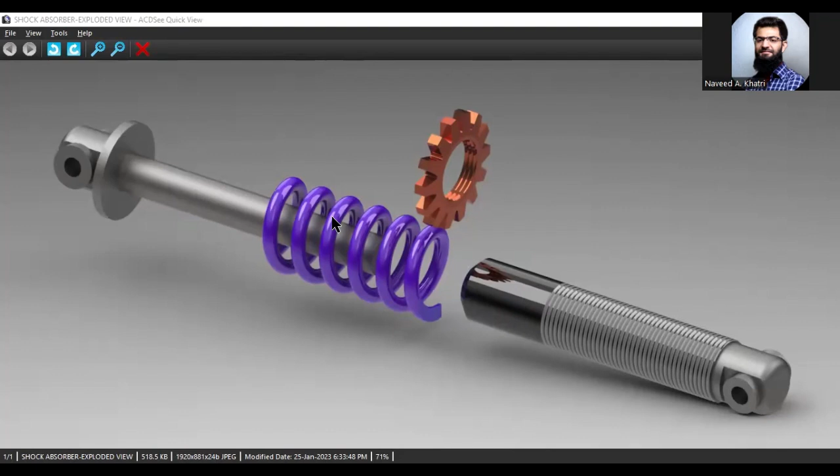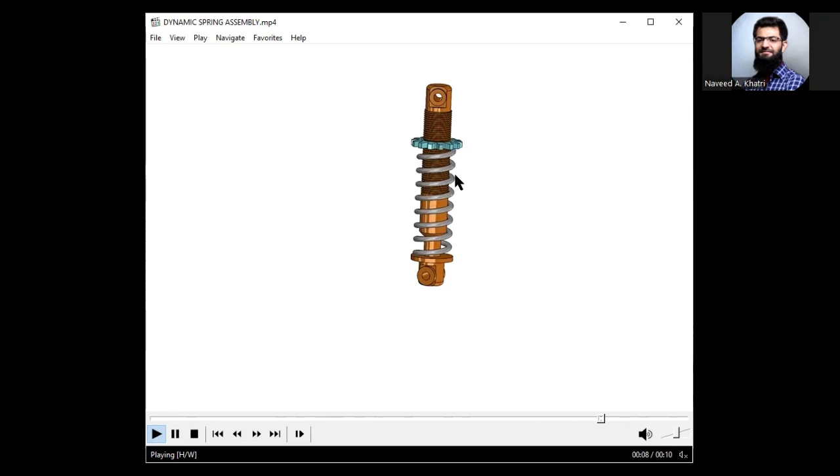In order to assemble this, what we saw in our class is that there could be two possibilities. First, as shown in this video, the spring compression and elongation is done with the help of this nut, which has a screw mate on the cylinder. When you play the animation, the nut will rotate along with the spring. The second option is that the nut is no longer rotating in the animation; instead, the elongation and compression of the spring is done with the help of the cylinder head. This is the usual scenario encountered when a normal shock absorber is in service.

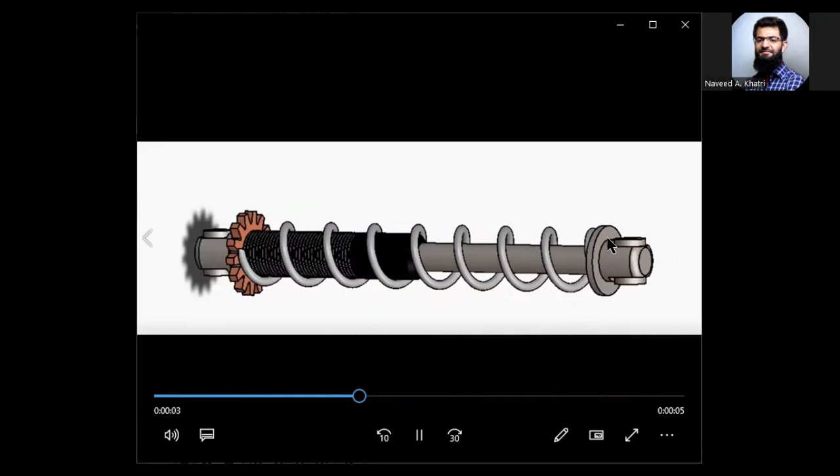So according to our class, we will try to assemble in a way that the nut is fixed and the shock absorber will move with the help of this cylinder head. So let's get started.

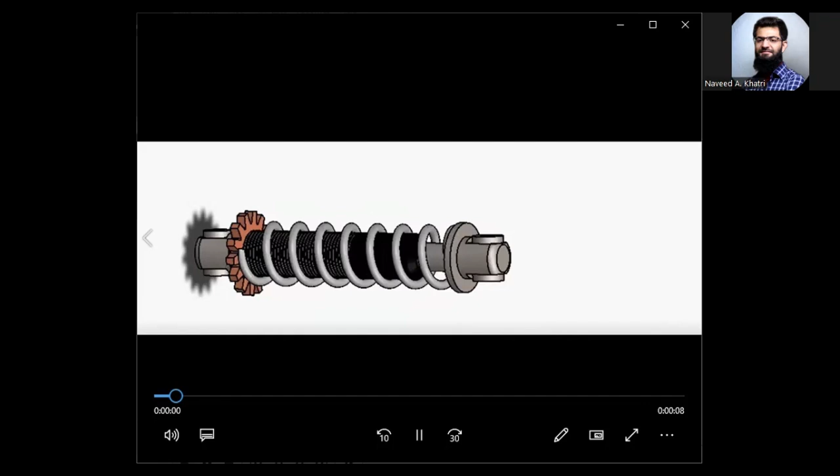Here in SolidWorks, we have already opened all 4 parts. Now you can go here, click on New Assembly. As soon as you open the assembly, on the left panel, all the parts are listed. With the help of the Control key, you can select them all and then click on the canvas.

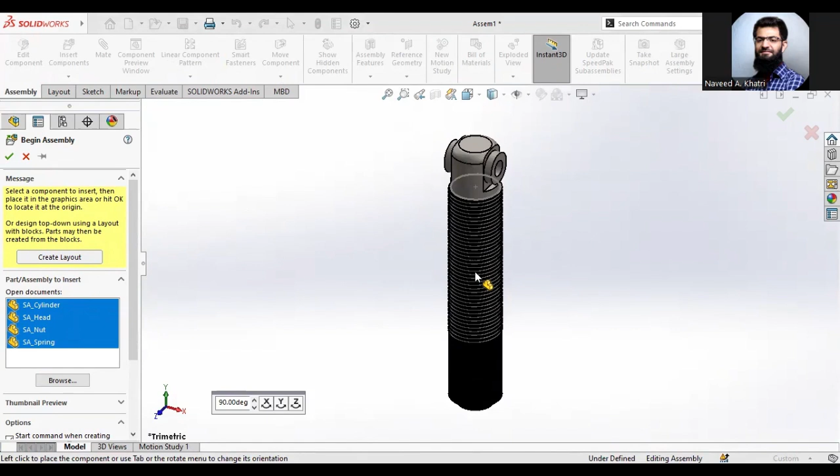Our first part is the cylinder, second is the cylinder head, third is this nut, and finally the spring. Once you have placed all the parts, you can start creating mates to assemble them.

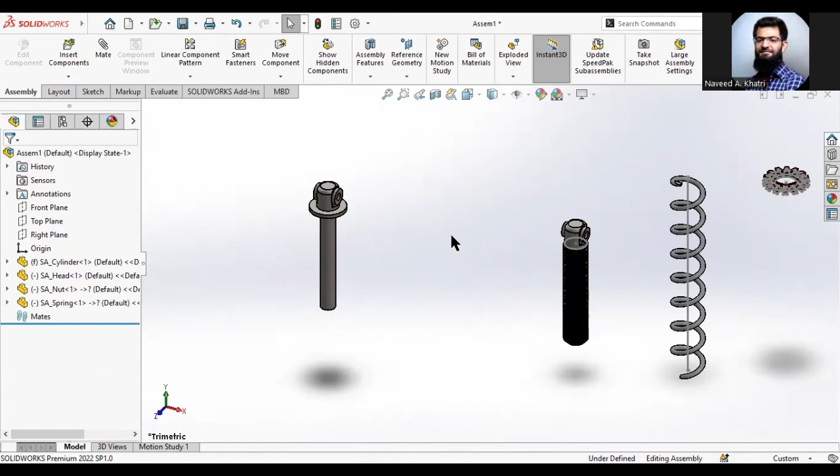To start the mating process, first we need to have the orientation of the cylinder and the cylinder head opposite to each other. So we select the cylinder from this tree and unfix this component by clicking on float. This was the first component in our assembly, so it was fixed by default. Now we have made it free, so you are able to move it and rotate it as per your requirements.

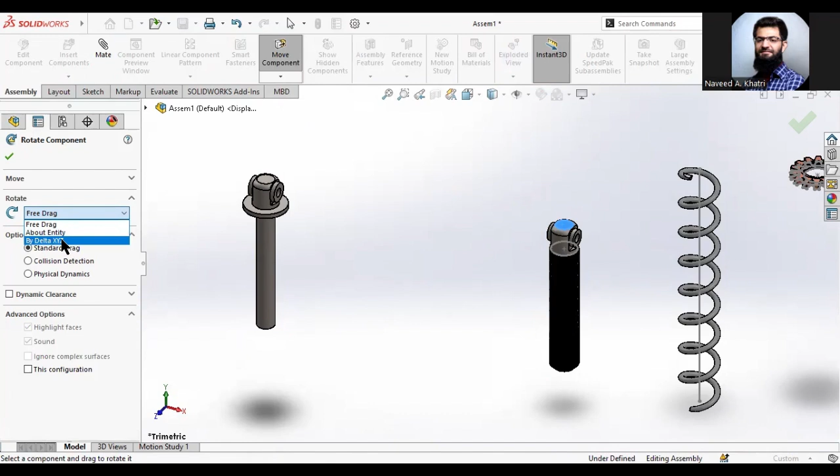We just selected this part and now click on rotate component. From the rotation drop-down menu, select by delta XYZ and rotate it about the x-axis 180 degrees. Just click on apply and it is rotated.

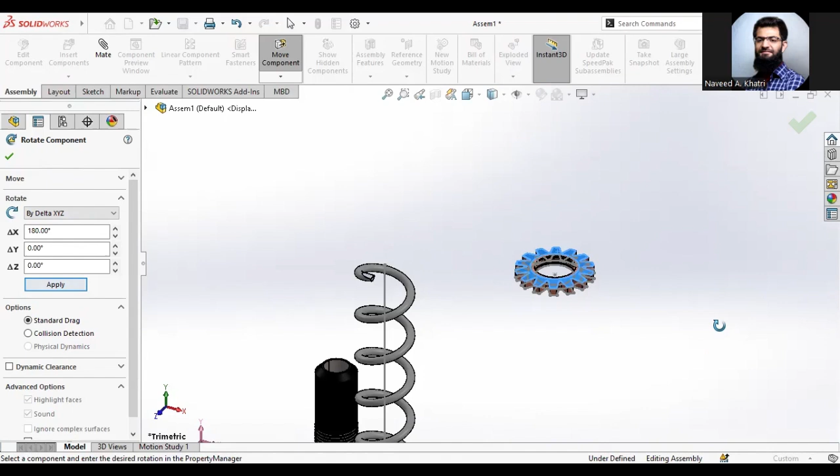Similarly, this nut is also to be rotated because it has two faces: one is the flat surface, the other is the curved surface. When we attach it with the spring, we will need the flat surface so that it is easily attached with the help of mate. So we select it and apply the orientation 180 degrees about the x-axis for this part as well. Just select this part, 180 is already there, click on apply, and it is also rotated.

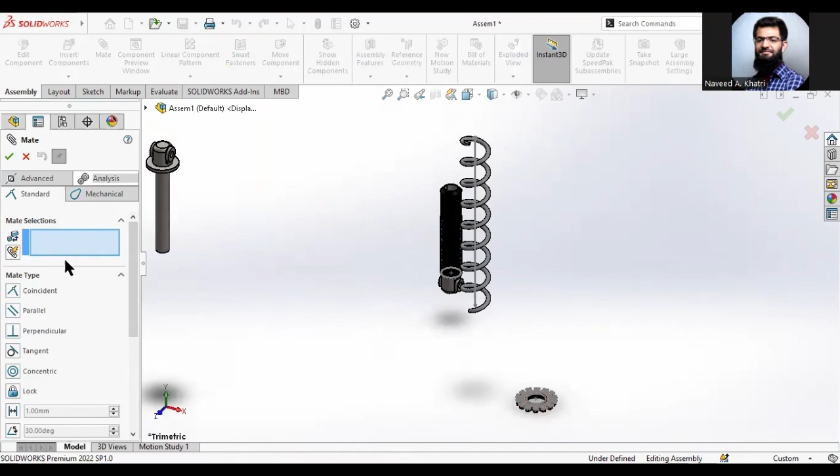Now we can come out of the move component step and start mating. First we go here to mates, and we can select this circular face of the cylinder and this circular face of the cylinder head and click on concentric. Now these two parts are concentric. Just click OK and come out of the mates.

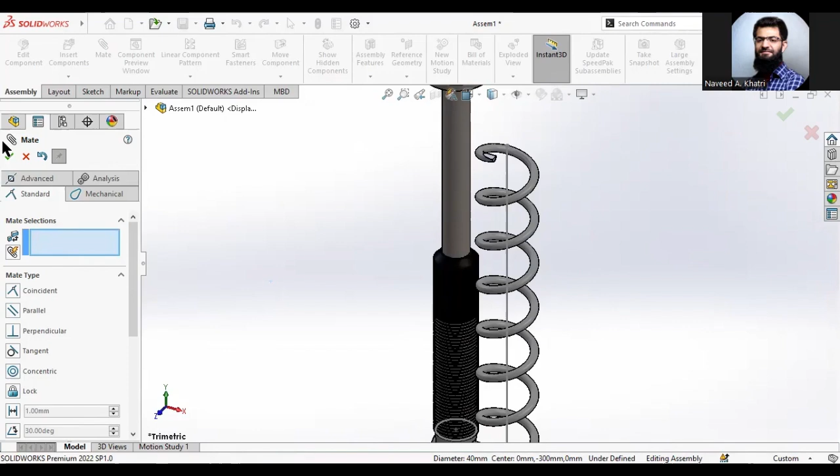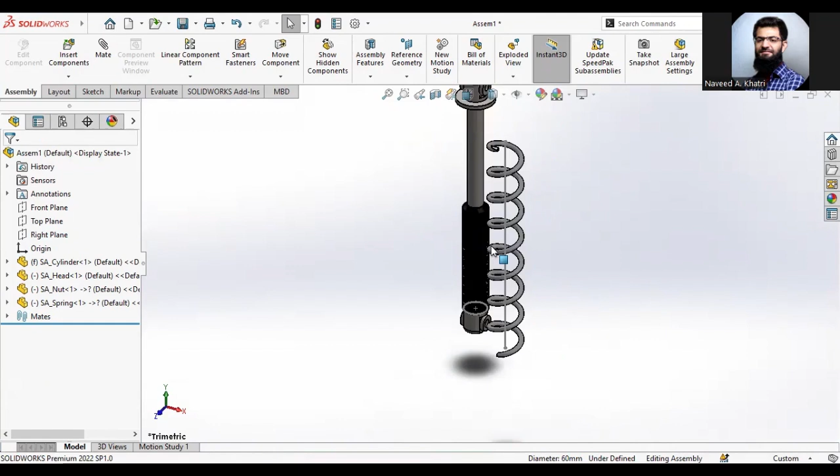Since in our assembly we have decided that the spring will elongate and compress along with the cylinder head, and the nut will be fixed, we can say that this part can also be fixed here. So after the rotation is complete, we can again fix this cylinder. We do not want it to go anywhere, whether in rotation or in translation.

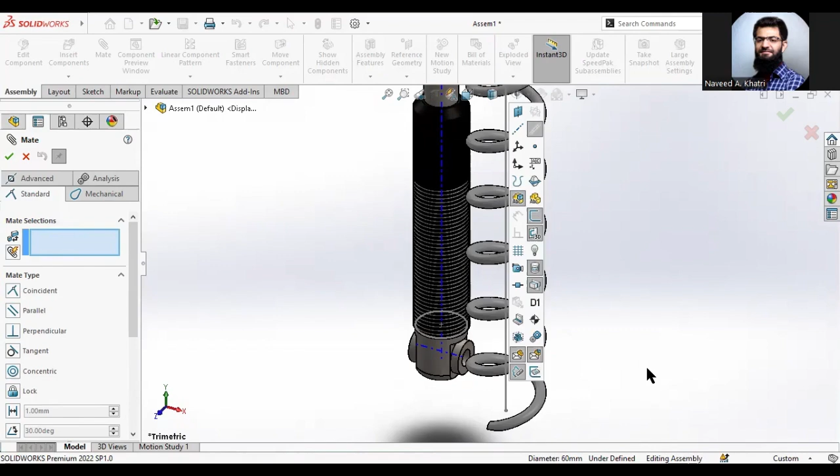Our next job should be to put this nut on these threads. So again, click on mate, and this time we need to have a temporary axis visible so that we can select the temporary axis of this nut as well as the temporary axis of this cylinder.

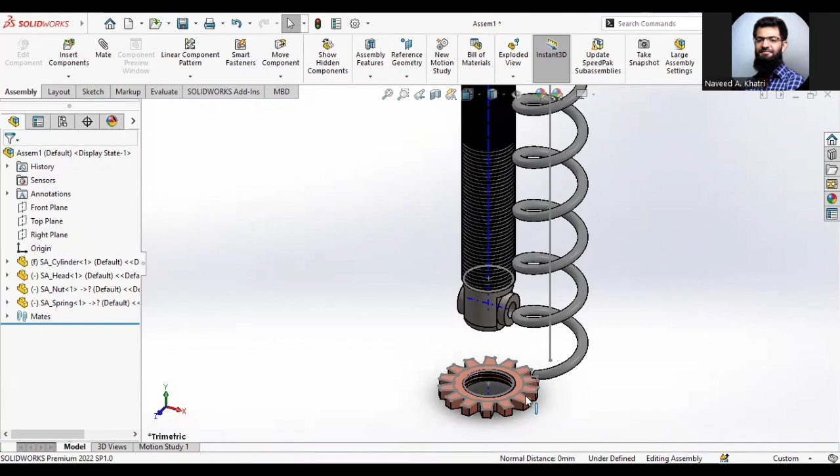So both of these axes are selected, and now this nut has been aligned with the temporary axis. Just click OK, come out of the mates, and now you can see that once you select the face, you are able to translate it along this direction. So we will put it somewhere here and then change our view orientation.

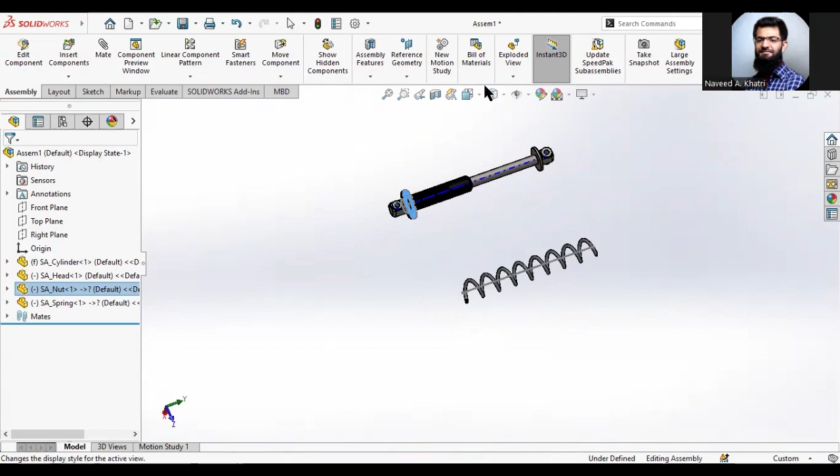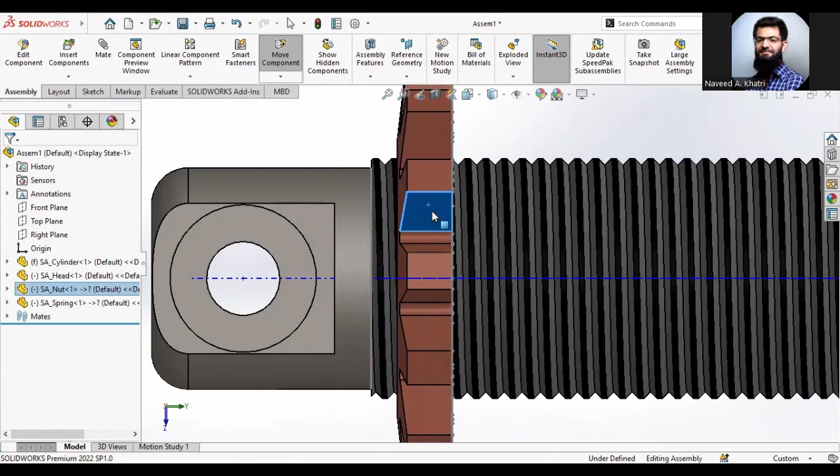Now we click here to get the perfect side view, and then we will fix it somewhere as per our requirement. So this looks fine. We do not need to make any screw mate with this nut because this nut will be fixed in our assembly, so we will just fix it. Once you are okay with the linear position along the y-axis, you can right click here and click on fix. So now the nut is also fixed.

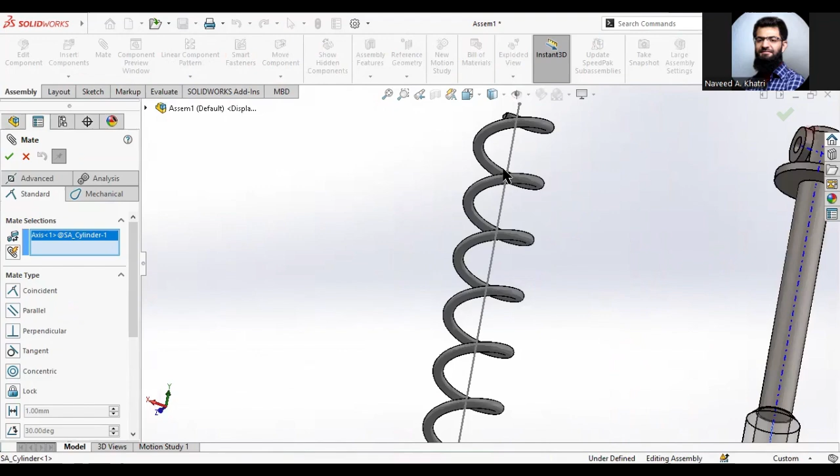Next, what we can do is we need to align the spring with this temporary axis. So we go to mate again, and this time just click on this temporary axis and this sketch of the spring that is visible. So now this temporary axis has been aligned with the spring.

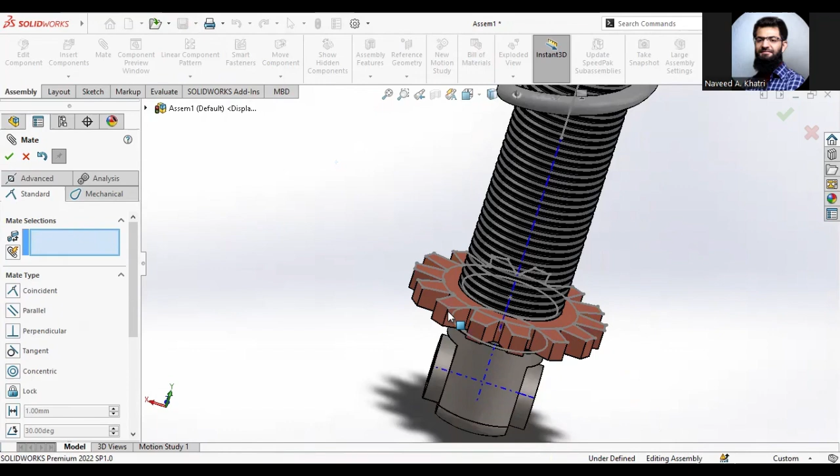After this, we need to mate the spring with this top part as well as here the bottom part that will be mated with the nut. And also we need to align these faces. So this face of the cylinder head and this face of the cylinder should be parallel to each other. So we click on parallel so that the rotation of the above part is fixed.

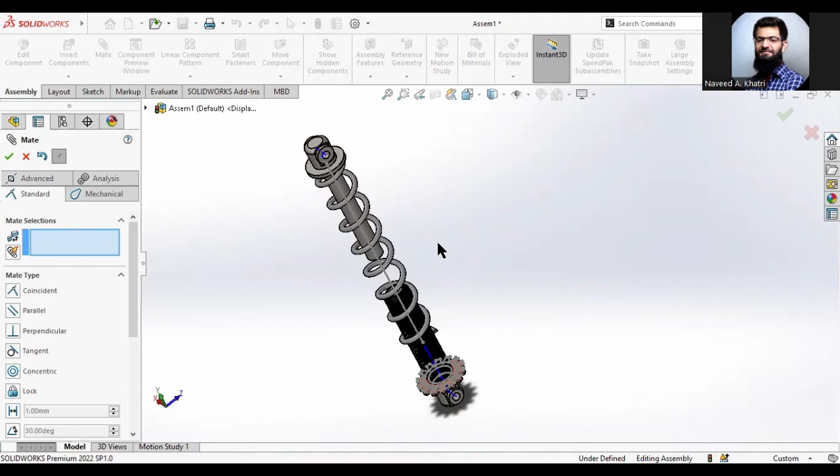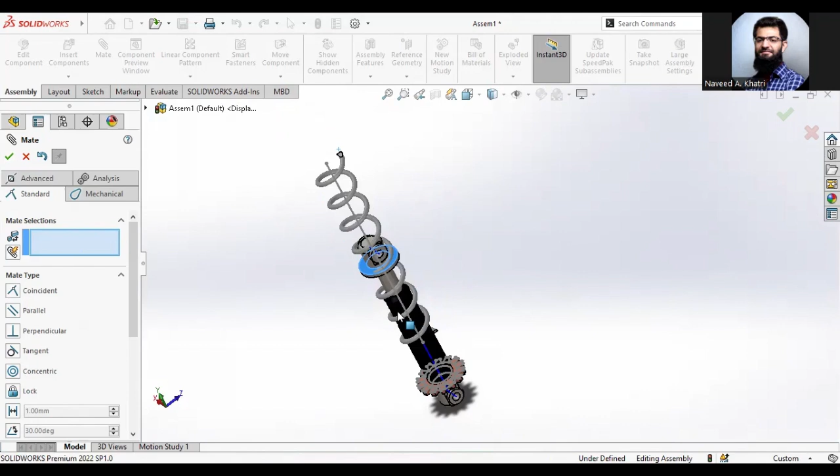Right now we are left with two types of mates. First is the attachment of spring from the top and bottom, and the second is the linear movement restriction of this cylinder head. See, it's going out of the cylinder as well as overlapping with the cylinder. So we will use an advanced mechanical mate in which we can set the linear movement so that it will be restricted to go up and down.

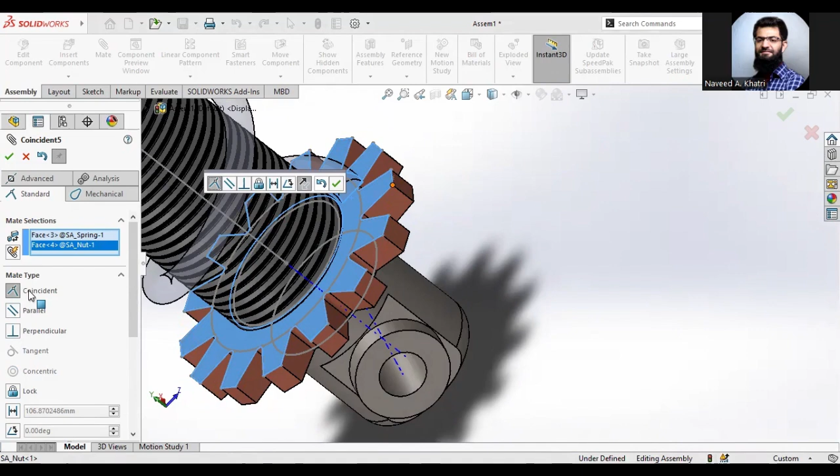So first of all, let's select this part, this face of the spring, and then select the flat surface of this nut. We have already rotated this nut, so now we know that the flat surface is right here. So just select this face. See, the spring is now attached. The coincident mate has been applied.

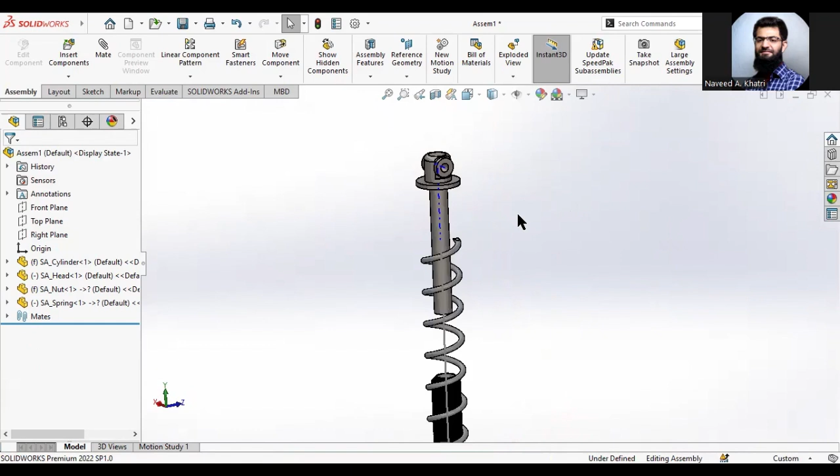Click OK. Now we come out of the mate and we set this view. Now, since we want it to be in the dynamic shape, that means when we pull this cylinder head, we want the spring to be pulled at the same time, and when we compress it downwards, we want the spring to be compressed as well. So in order to achieve that, we cannot use the coincident mate.

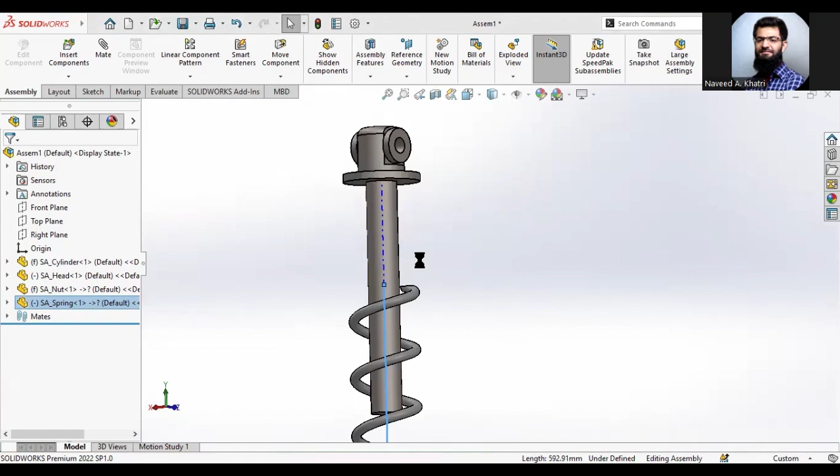What we need to do is click here on the spring and click on edit sketch. This pop-up will ask you to save this assembly. You can save it anywhere and give it any name that you like. Now the assembly has been saved and it will open the drawing for you.

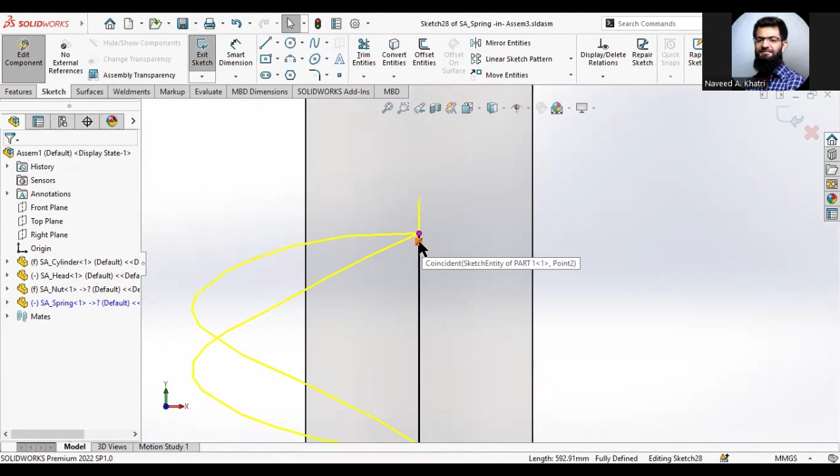So in this drawing, you can see that this is the sketch of the spring that we are editing right now. And here at this point, there is a coincident constraint. You need to double click it, and then from this menu at the left, you need to delete it. So now this constraint has been deleted. Click OK, and now you are again in the sketch mode.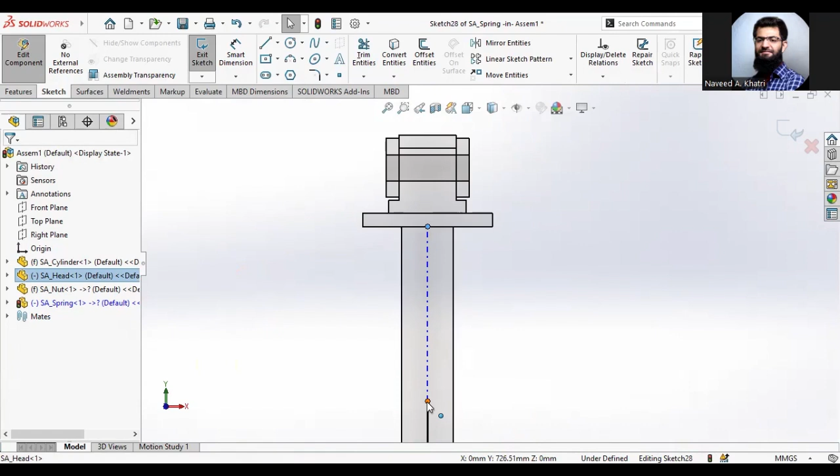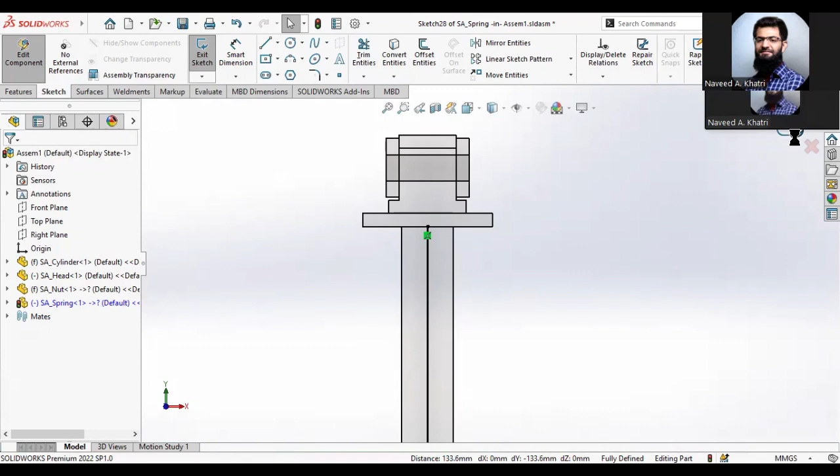So what you need to do is pick this point right here, which is at the cylinder head. Press Ctrl and then click on this point, which is at the spring sketch. Both of these points have been selected, and now using the relations, you can define the coincident relation. So now see that the spring has been elongated, the sketch has been elongated, and this is now constrained with the cylinder head. Just click OK and click here to come out of the sketch, and then click again here to go back into the assembly.

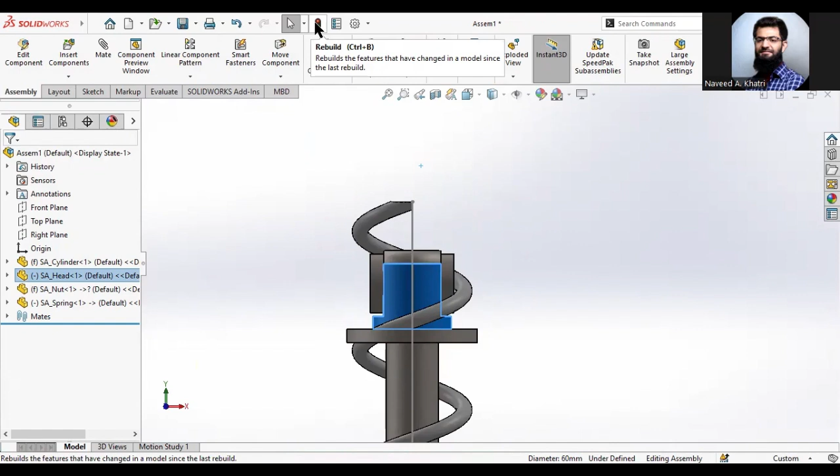Now here we can see the dynamic behavior of this spring, whether it's working or not. What I need to do is pull this down a bit and click on this single button, which is called rebuild. You can also use Control B. So once the rebuild is complete, you can see the spring has been compressed. Similarly, if I pull it again and click on rebuild, the spring has been elongated.

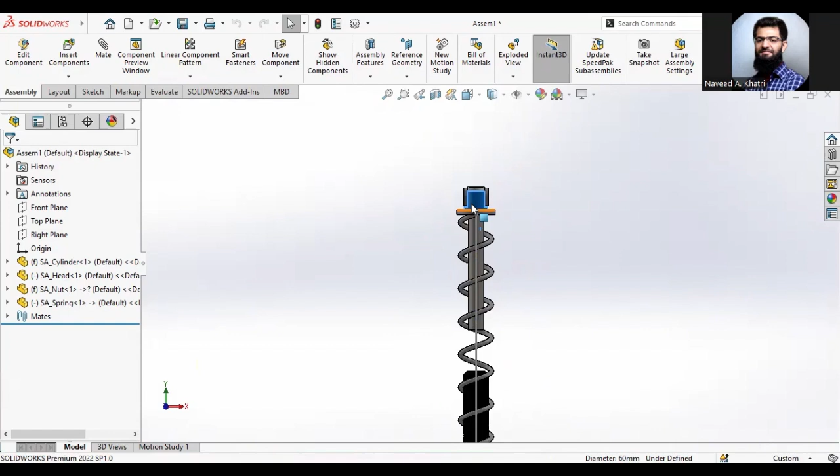So this works fine. The final thing that is left is the distance limitation. For that, we need to go to mates again.

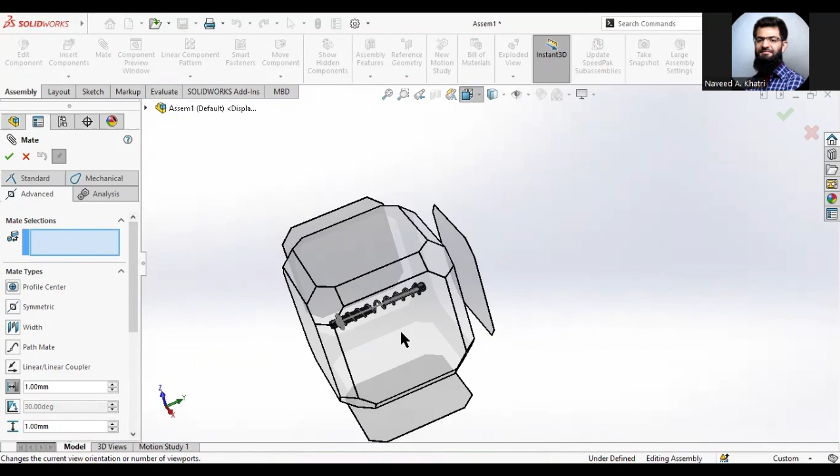This time we will choose the advanced mate section. In the advanced mate, just click here on the distance. You might also want to set the orientation first, so we will choose this side view.

In this distance, you need to specify the flat surfaces. This flat surface can be selected at the nut, and at the cylinder head, this flat surface can be selected. So now SolidWorks will calculate the distance between these two faces.

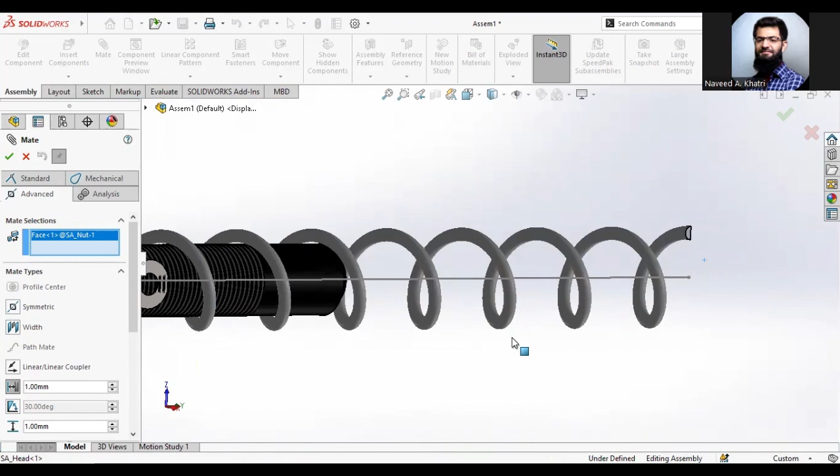Again, you can set the view, and here 1 mm is selected. We just increase it to 300 mm, press tab and see what happens. So at 300 mm, this is the distance between the flat surface of the nut and the flat surface of this cylinder head. If you are okay with this minimum distance, you can just note it down.

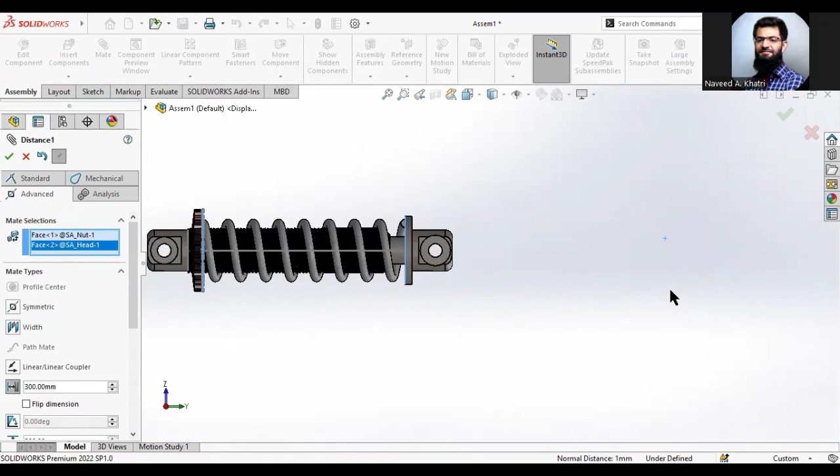For the maximum distance, you can also try using a hit and trial rule, or you can also check the dimension of these parts. So for the maximum part, we try with 500 units and see what happens. At 500 units, we are at a safe distance, and this cylinder head is not coming out of this cylinder.

So we can just fix it with 300 and 500, or we can also play around a bit to see the maximum length that the cylinder head can go. For now, we are setting it to 500 maximum and 300 as minimum. This will be the linear movement restriction between these two parts.

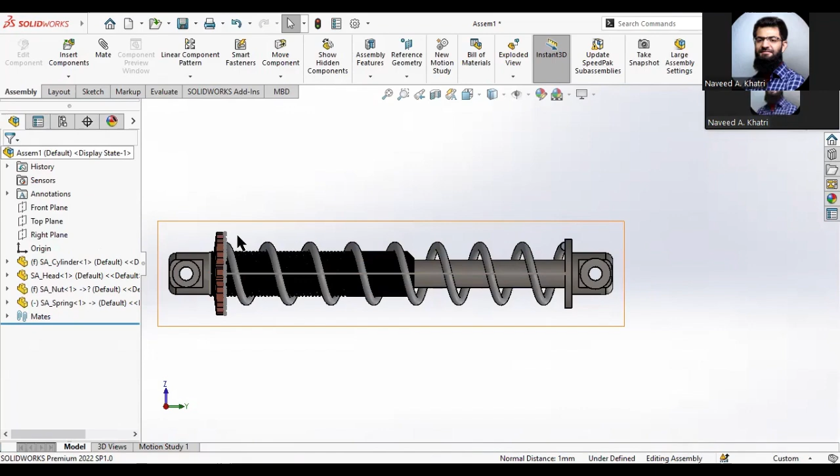Once you are satisfied with the movements and limitations, just click on OK. Come out of the mates, and here is your assembly complete. You can verify it using this. See, it is not going towards left anymore.

This is the limit. You can click on rebuild to compress the spring. Similarly, you can drag it and see this is the maximum distance that you can drag, and then again click on rebuild to see whether the spring is working or not.

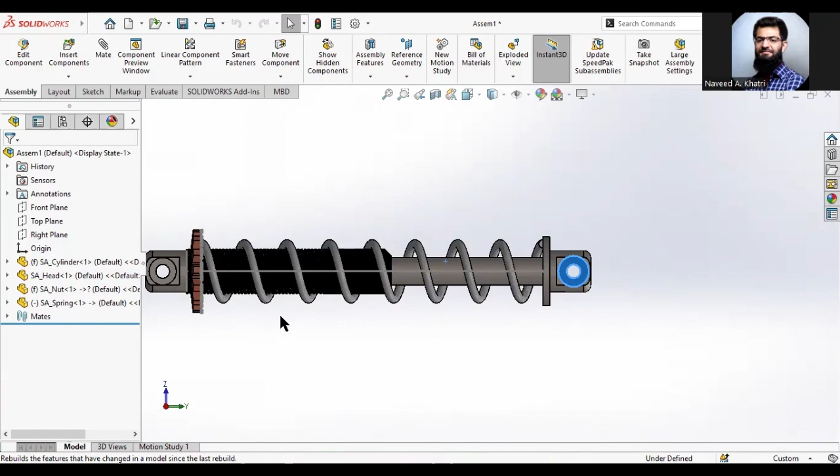At this stage, one final touch is remaining, which is to hide these sketches. This line can be hidden. Just click on line and click on hide. These sketches at the nut are also visible, so just click on this sketches and then click on this eye button to hide the sketch.

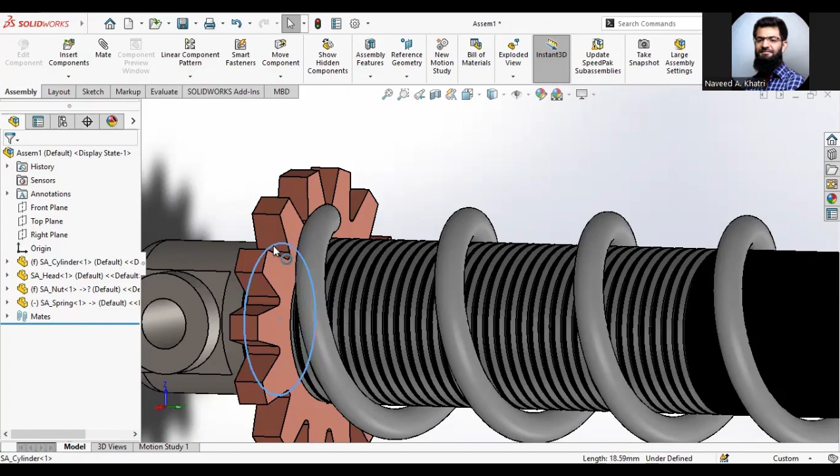Finally, this circle is also visible from the sketches, so just right click and click on hide. So all the sketches have been hidden, and your final assembly is complete.

Now the next stage is to create an animation. In order to create the animation, you can also set the scenes, set the background, or change the color of your parts, whatever you like.

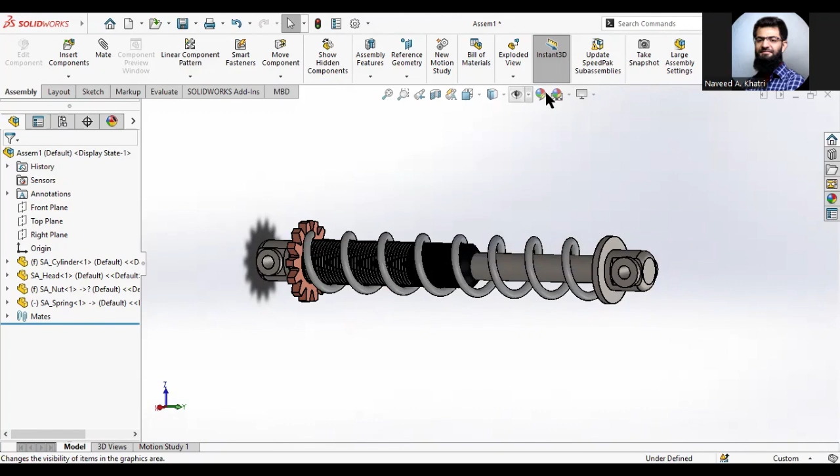Let's say we choose the background to be plain white. So this is the plain white, and because of the appearance of the plain white background, you are able to see more bright colors of these parts.

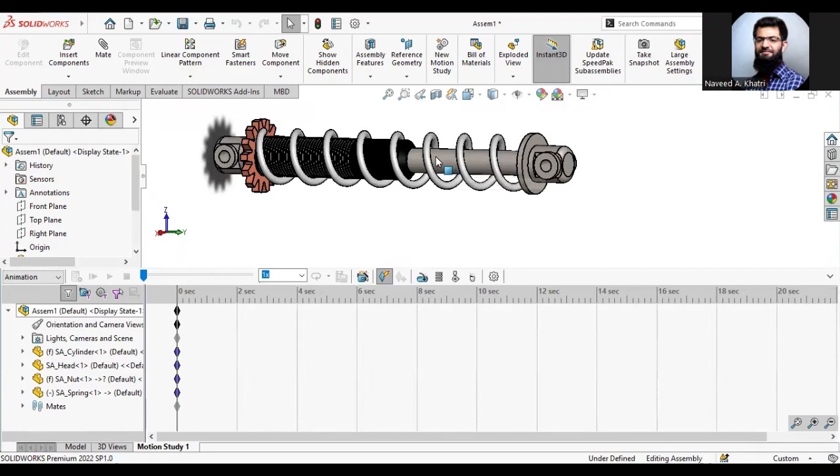In order to create the animation, what we can do is go to motion study and set the orientation first. After setting the orientation, you can click on this key and click on replace key. So the start of the animation at 0 seconds, this will be the default view of your assembly.

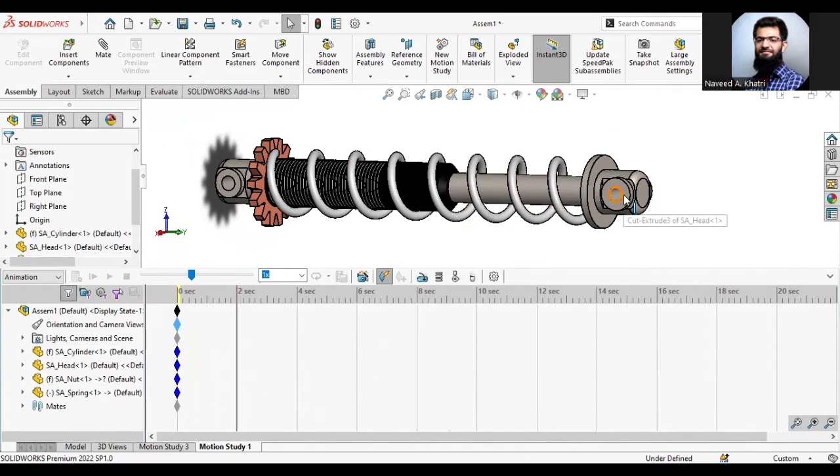Now the spring is already elongated. What we can do is compress the spring. In order to do that, we will drag our timeline to 2 seconds and then drag it to the left, then click on rebuild.

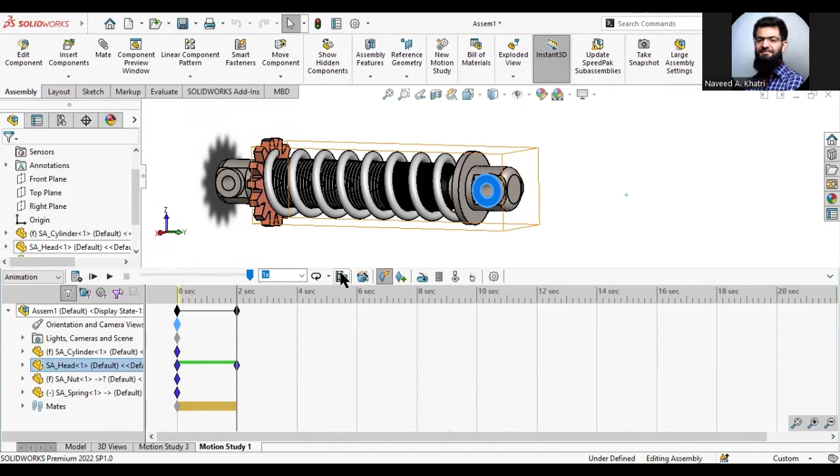So SolidWorks will save this file and record the animation that from 0 to 2 seconds, this spring will be compressed. You can calculate the results, you can play it again, or you can save the animation. That's all, thank you.